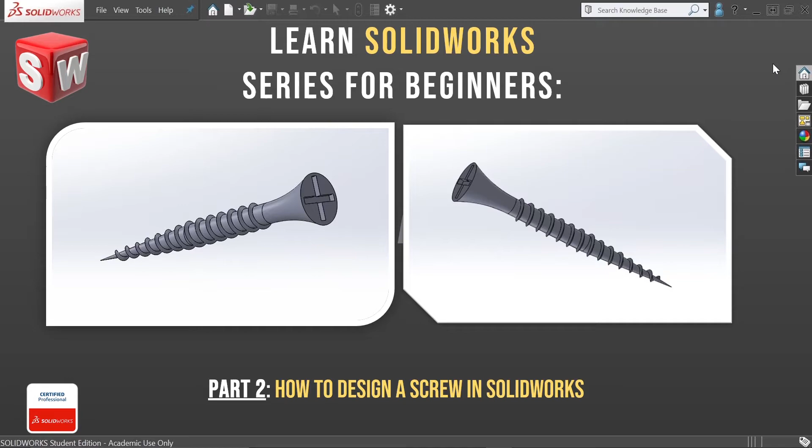In this video, we're going to design a simple crosshead screw on SolidWorks as a means of practicing how to use SolidWorks' major features as well as getting familiar with the software's user interface. The final design we'll achieve at the end of this video would look like these two models. This tutorial is applicable for complete beginners, so if it's your first time using SolidWorks, this video will be a perfect fit for you. So stick around for more coming up.

Okay guys, welcome back, so let's begin. First things first, sketching. First thing we need to do is sketch a figure and then we can add any features to it. That's how SolidWorks actually works.

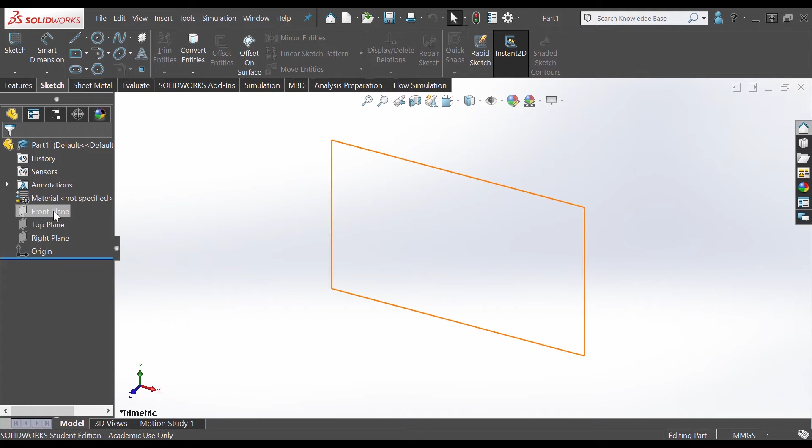First things first, front plane. We're going to sketch the first figure on the front plane. Go to the sketch tab and choose a circle. Go from the origin, stretch, then we're going to dimension that, go to smart dimension, we're going to choose 3 millimeters.

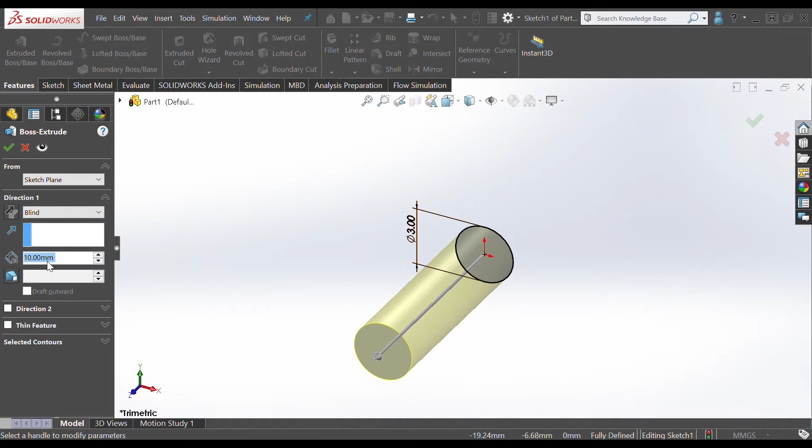We're going to extrude that, so features extrude, so that we can increase or just extrude the 2D figure into a 3D figure. We're going to extrude that by 10 millimeters. As you can see, there's a preview of that. Then we're going to click OK.

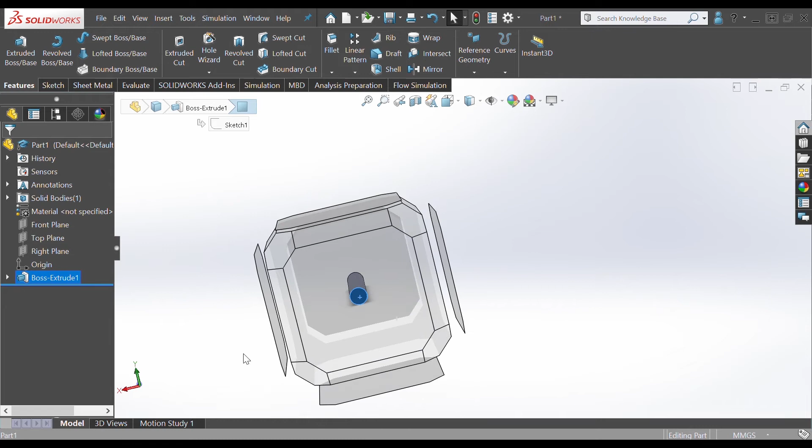That's the first part. The second part is we're going to sketch another circle on either end. So if we chose this end, just click on it, press spacebar so you can get that cube thing for the orientation, and then choose this face. As you can see, it has zoomed in. After pressing that, you can go to sketch and click sketch so that we can actually sketch on this figure, so that we want to sketch the same circle that we sketched earlier.

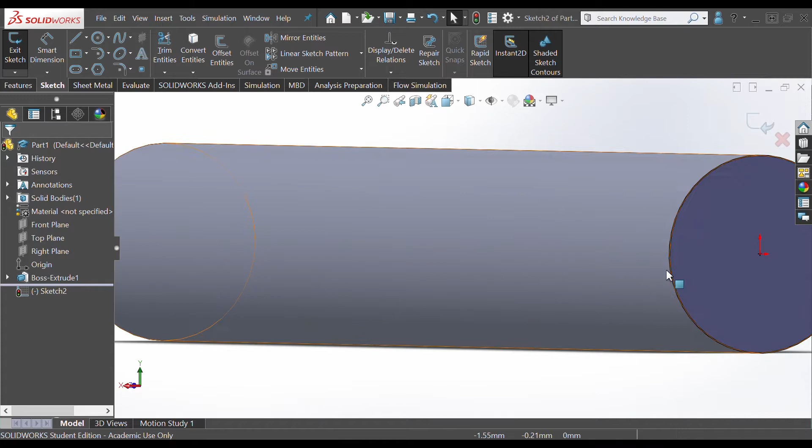So there's another way. Instead of just going to the circle and matching the outlines, we can go to convert entities, and as you can see, because we already selected the figure, it has converted the entities. You can see a dark border for that. So it's kind of sketched with the same dimensions we already have done, which is 3 millimeters.

And we want to extrude that, but the other way around. So we're going to go features, extrude boss base, and as you can see, extrude it the other way. And we want to extrude that by 17 millimeters.

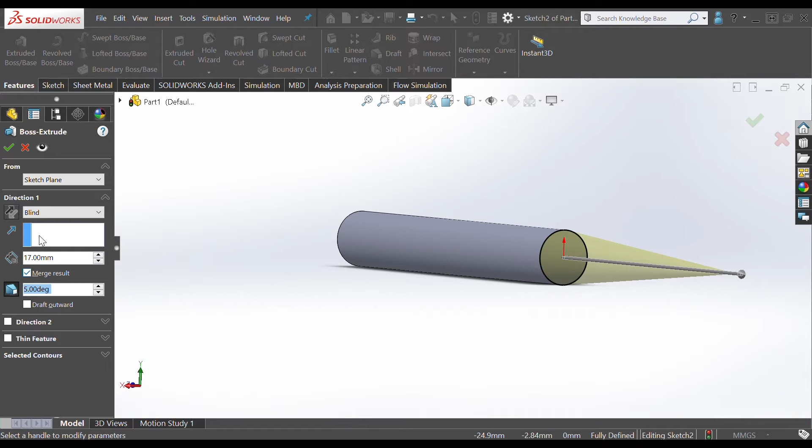As well as we want to actually put a draft or an angle to it, so we're going to go for 5 degrees. As you can see, it converges to a needle-like shape. And yeah, that's good. Press OK.

As you can see, we've done this part separately, and we've done the needle type in two extruded features. Next step is doing the same thing but in the opposite direction of the figure, so on this face.

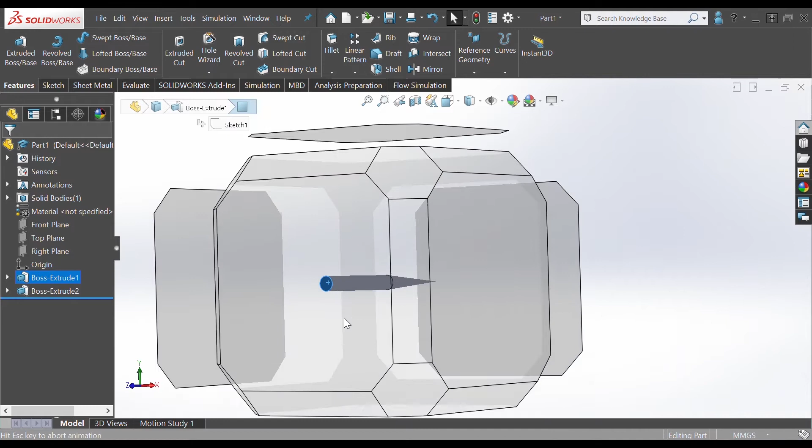So you're going to click spacebar, change orientation. As you can see, it's zoomed in. Go to sketch again, and we're going to use convert entities as well because it's the same circle. And we're going to extrude that by, let's say, 4 millimeters.

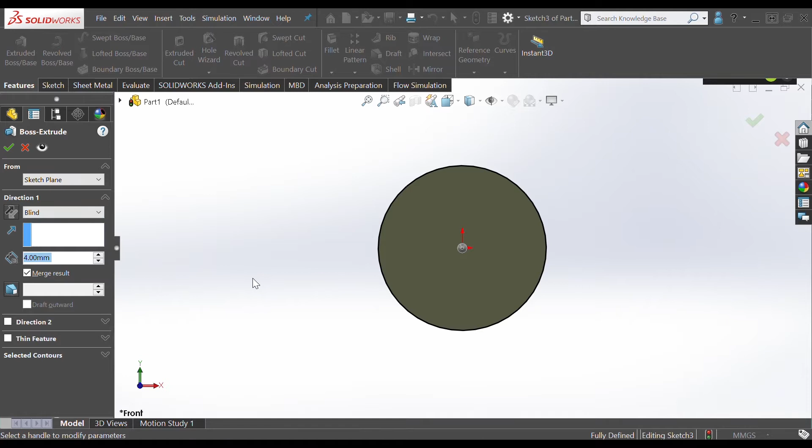We don't want that long. So this is the preview, and we want an angle as well, of 30 degrees. But we want it on the opposite, so it drafts outwards, not inwards. We don't want it like a needle shape, like this part of the figure. We want it drafting outwards. So yeah, 30 degrees is good.

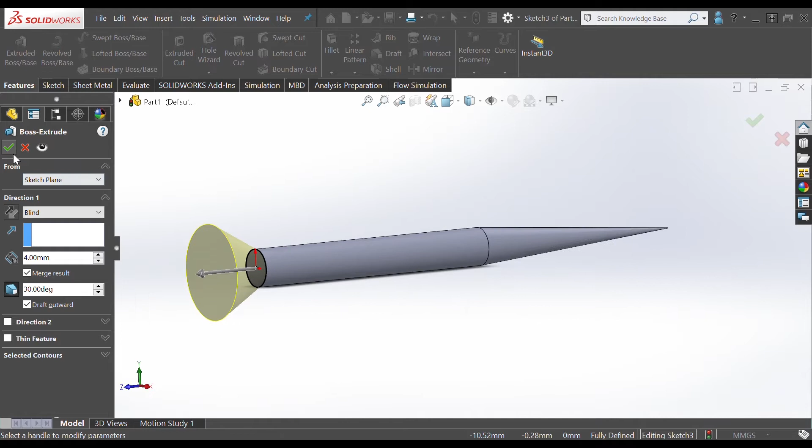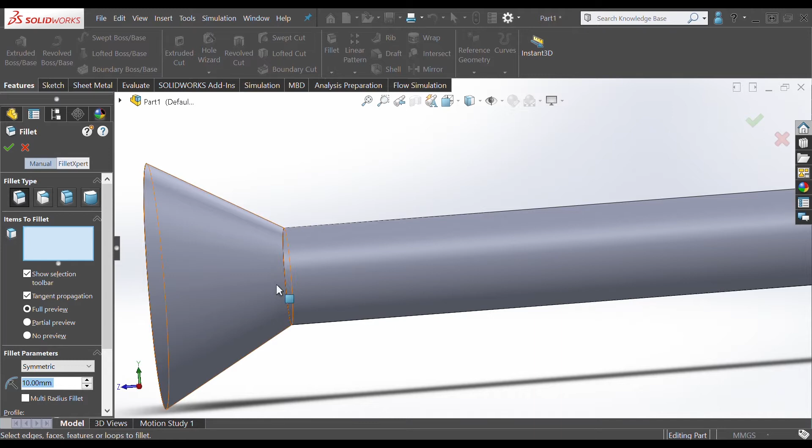Press OK. This looks kind of rough, going from a straight figure into a curved figure, so we can just fine-tune this edge by choosing a fillet function. Going over here, as you can see, the fillet function is open in the tree manager, and then we can choose this figure.

Let's say 20. Yep, 20. Then press OK. As you can see, it has been fine-tuned, just stretched out easily, not like a sharp edge bent, which is a lot better. As you can see, the actual structure of the screw has been defined easily just by using extrude, boss extrude, and fillet functions, just normal sketching and extruding.

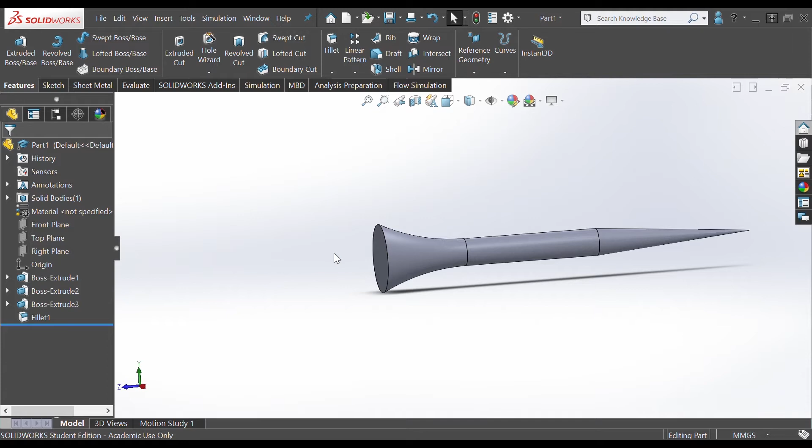Next thing is we want to draw the cross heads over here. So we're just going to press on that shape, surface, and then go sketch that. We're going to choose a rectangle, preferably a corner rectangle, or let's first choose a center line.

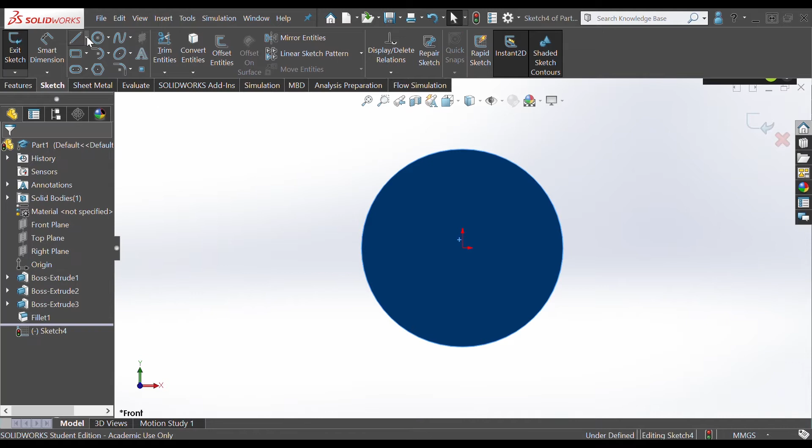So let's choose a center line so that we can outline our drawing, as you can see, and let it pass through the midpoint. Again, a center line horizontally. We're going to press that, zoom in, choose this, keep pressing control, and press on the midpoint of this coordinate plane, and choose midpoint so that you can align it accordingly. That as well, the horizontal line as well, control and the midpoint.

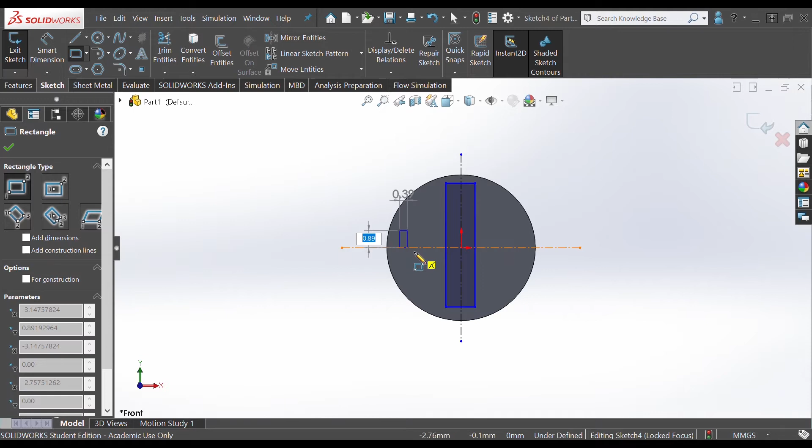So then we're going to go to the rectangle, corner rectangle, and draw a simple rectangle like that, and then do the opposite way around as well. Don't regard the dimensions, we can change that with smart dimension easily, just draw the figure. So for this one we want 1 millimeter, and this one as well, 1 millimeter.

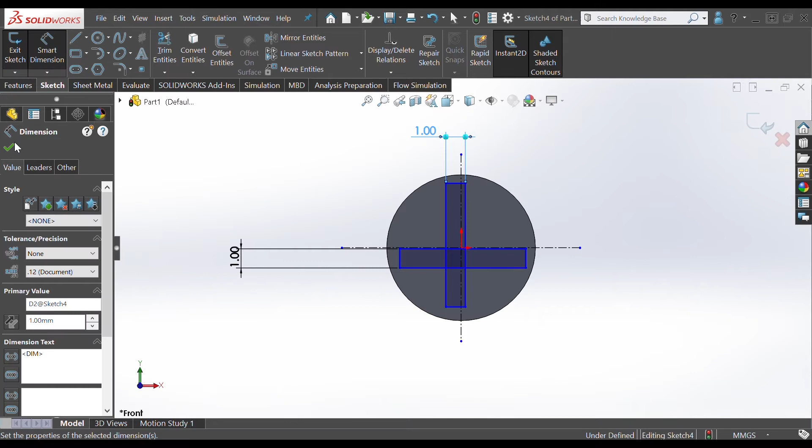Another function we can use is that we want these 3 lines to be symmetrical so that they come into the middle exactly. So you can press this line, keep holding control, press this line and that one as well. As you can see, there's a symmetric function that appeared. Just click on it and it adjusts the figure in the middle.

Do the same thing for this rectangle as well. You can choose that, this, and that as well, just symmetrical, and as you can see, it adjusted quite well. I mean, the lengths, you can adjust the lengths, but for now it's fine. It looks all right.

Another thing we want to do is just trim these parts. So for this part, we can go to trim entities, which is just a function that trims these extra additional parts. So we're going to go trim, power trim is fine, and just press and go through it, press and go through it.

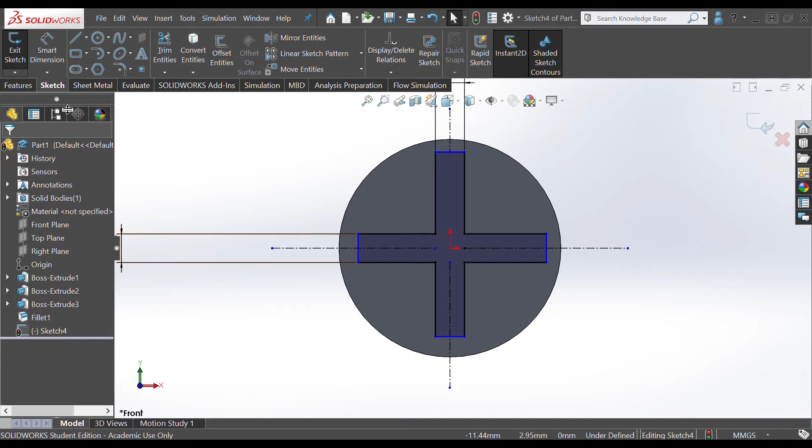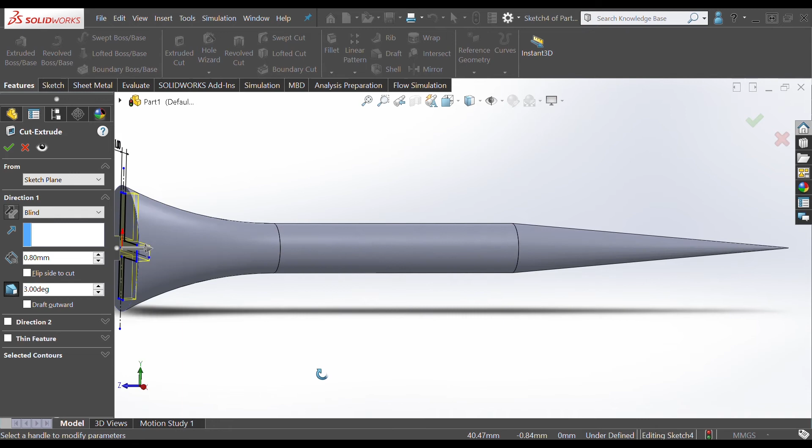You can trim the central line as well, and this part too. As you can see, you have a clear plus sign, cross head. We want to extrude cut that, to cut through the actual object, so we're not going to use extrude boss base, we're going to use extrude cut, and cut that by about 0.8 millimeters, and draft that 3 degrees, something simple. Click OK. As you can see, that's the cross head that you've made.

The final thing we want to do is the spirals, the screw spirals, which is the last thing. For that, we are going to right click on front plane, view it, then go to features, reference geometry, or press sketch first so we can go back. Just press X. Show front plane, then go to features, reference geometry, and then plane.

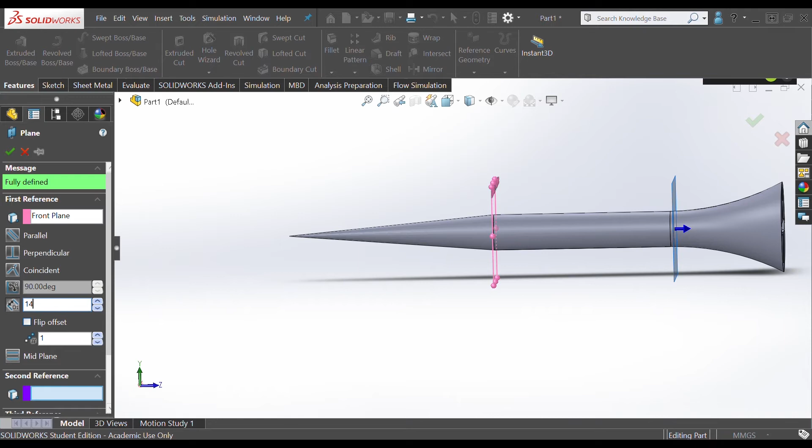So 14 looks fine, we can do 15, or 14 and a half, so that we can start this spiral drawing from here until the end. We can get rid of that, just hide it, then right click on that and sketch, spacebar, choose this orientation so you can see the outline of the circle.

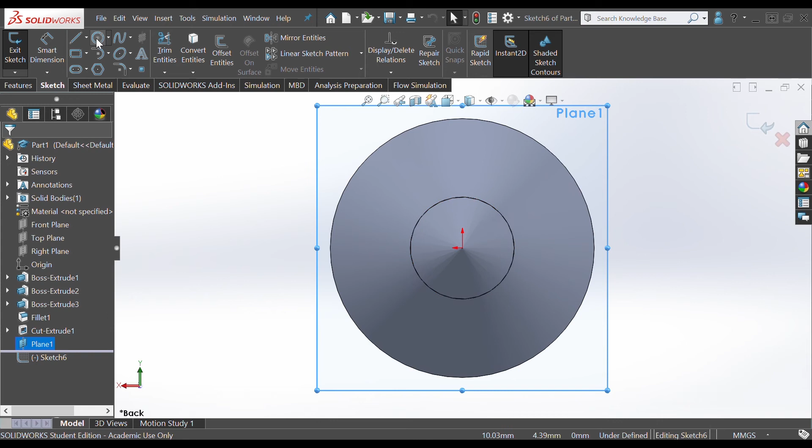We want to draw the same circle for that. We're going to go this way, like that, and then OK. After drawing the circle, we're going to go to features, curves, and then helix and spirals. As you can see, there's a yellow outline for that, which is like the helix path.

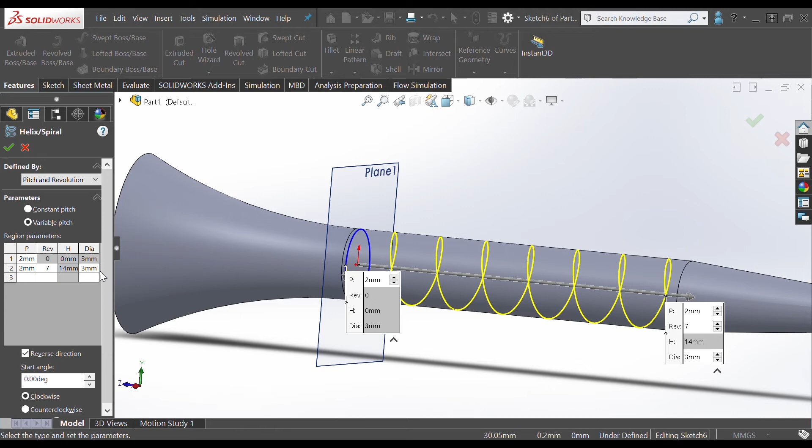So we want it till the end, but as you can see, it's the same figure, so if we actually went all the way to the end, it's not going to adjust to the declination of the surface of the needle at the very end. So we're going to choose variable pitch, and type in that we want the pitch to be 2 millimeters. This is going to be the 8th revolution, and we want that to be 2.5.

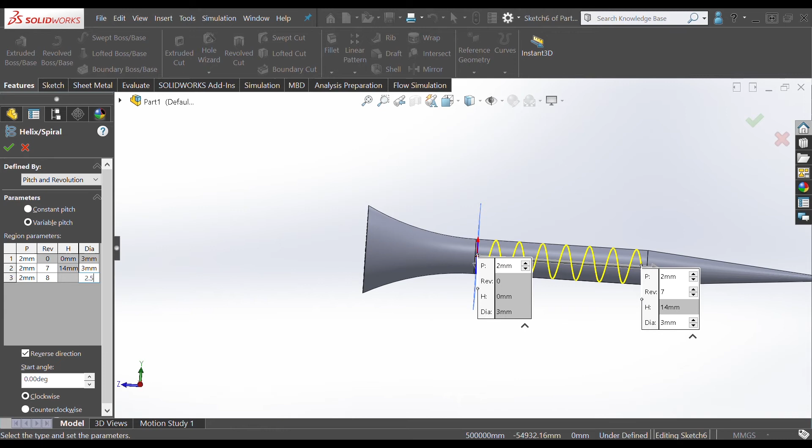As you can see, it has adjusted. As we increase in revolution, it adjusts to the surface based on the diameter of the circle. So we're going to go 2 millimeters as well, 9th revolution, and 2.2.

2.2, and we go 2, 10th revolution, and say 1.9.

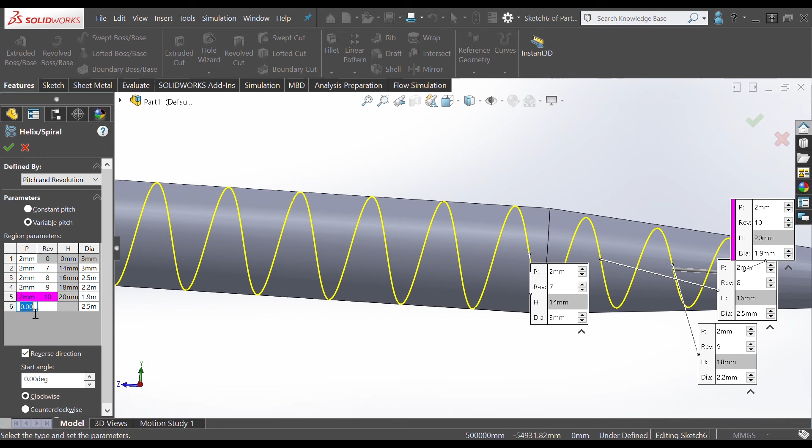As you can see, let us remove these tabs of it. It's just adjusting, decreasing the diameters based on the surface, so as we progress with the revolutions, the diameter should decrease. So we've got 2 millimeters straight to 11, and that is going to be 1.5.

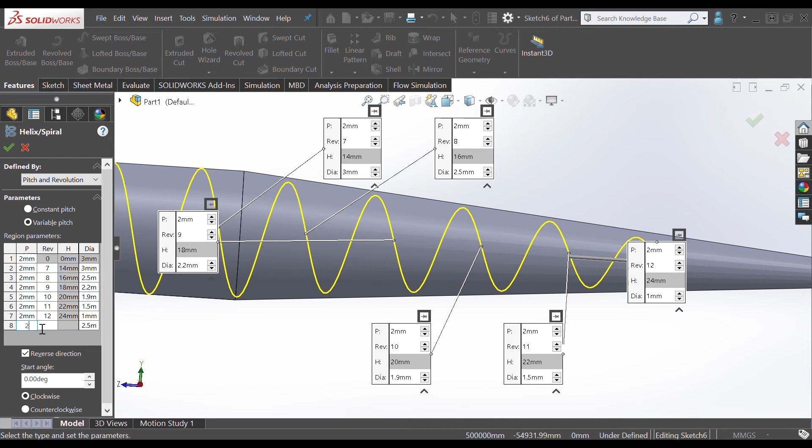12th revolution, we're increasing the number of revolutions as we progress, 1, 2, 13th.

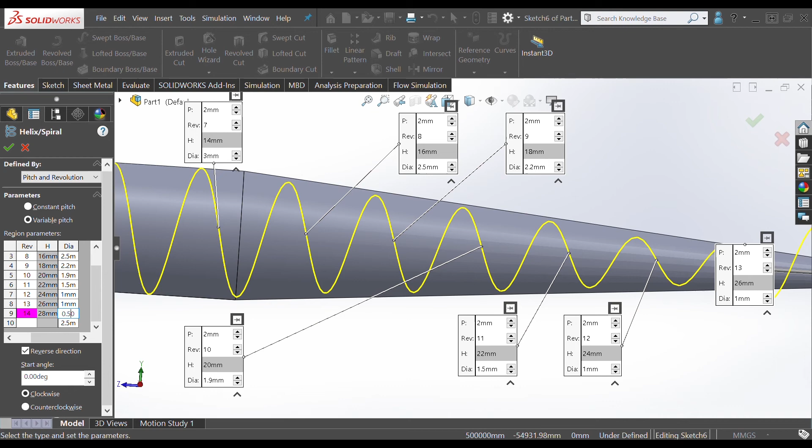Let's keep that one as well, then we go 2, that's the last part, 2, and then 0.5. As you can see, it adjusted to the very end, so we're going to stop over here and click OK.

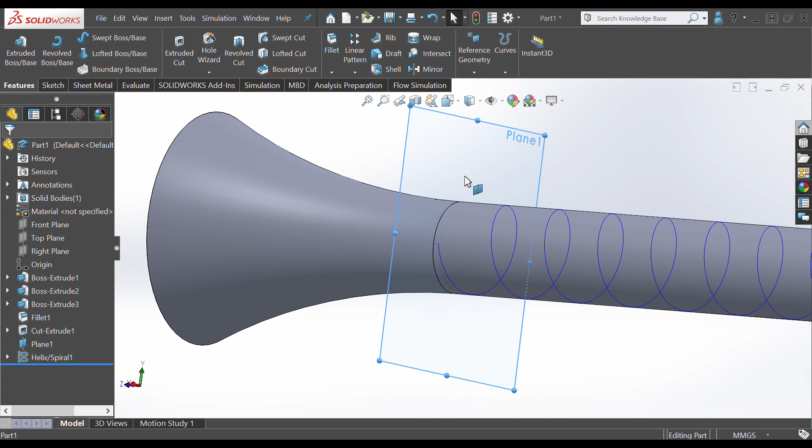So there's a dotted pathway for that, so there's a feature we're going to use. We can actually hide this plane. The feature I'm going to use is called swept boss base, which actually uses a profile as well as a path to draw certain figures. For the sweeping thing, we're just going to go all the way to the end over here.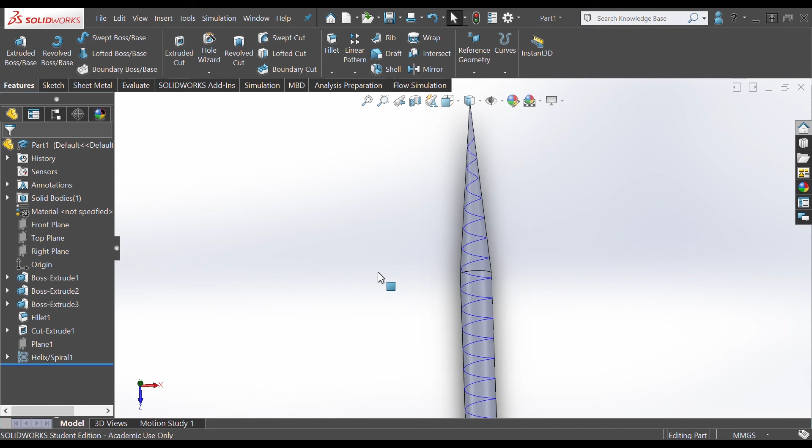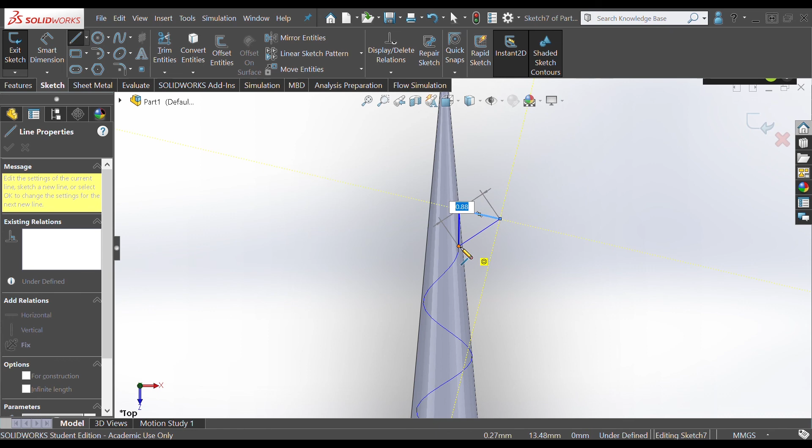I'm going to choose the top plane, right click on that, press on it, go sketch on the top plane, and zoom right through the end. We're going to draw a small triangle from the very end over here. Don't mind the dimensions. Go to smart dimensions, I'm going to give that a 0.6, give that a 0.7 for example, and then we want these two to be equal.

So we're going to press that line, keep pressing Control, this line, and then we're going to choose equal. As you can see, it has adjusted.

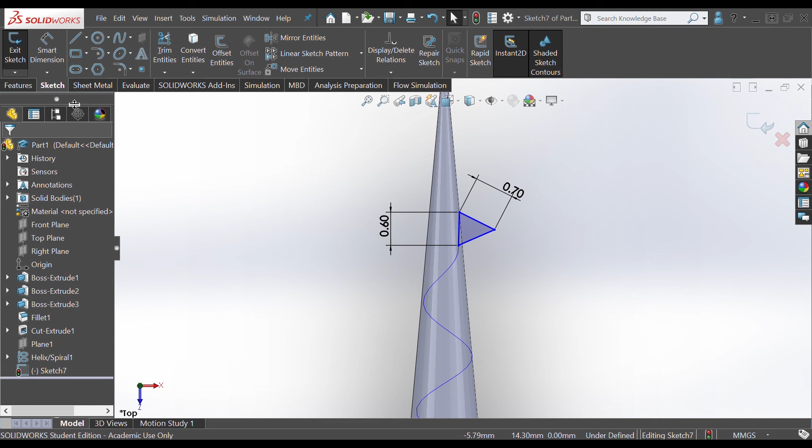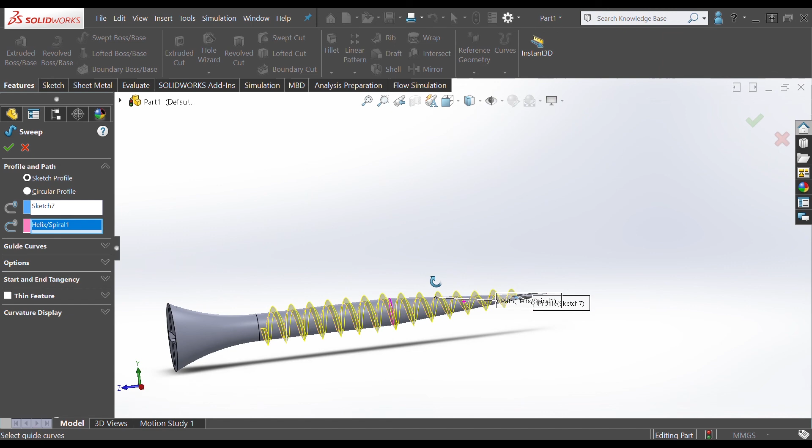The final step is going to features, swept boss base, and it says enter the profile. As you can see, there's the triangle. Enter the profile, you're going to choose any edge of that, and it's going to include the whole sketch. Then it says enter the path, and we're going to hover over the swept path, which turns orange. Just press on that, and as you can see, there's a very clear preview of how it's going to look. Perfectly fine, press OK, and there you have it.

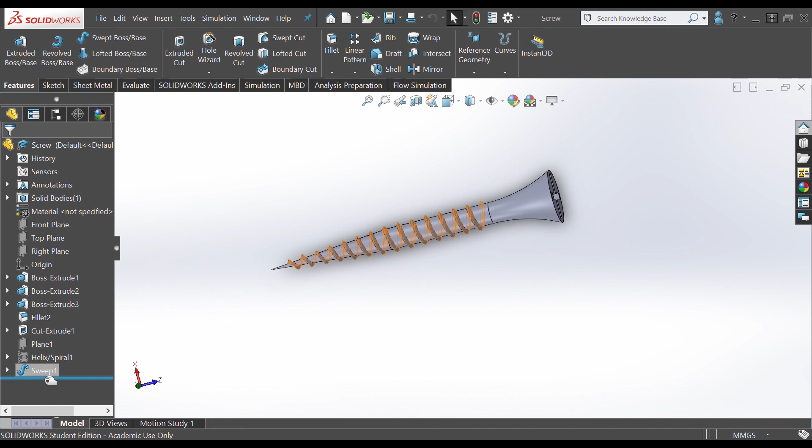As you can see, the spirals are all good, looking good. The crossheads also look good. The overall structure of the screw is fine, the dimensions are alright, and we haven't used many layers, features or sketches. Just a very simple preview, and that's it.